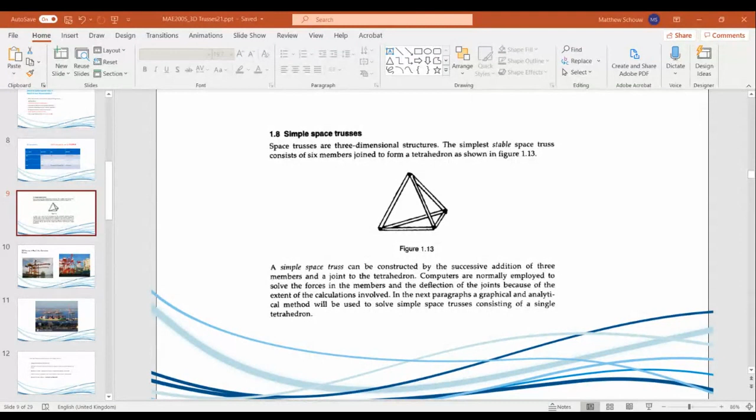Yeah, sorted, okay fantastic. So the chapter we're starting on is part of chapter 1, under the 3D truss section, or what we call a simple space truss. Just quickly going over what this is: a space truss is a three-dimensional structure, and the simplest stable space truss basically consists of 6 members and forms a tetrahedron. That's the most simple, basic form. It's not really of particular importance.

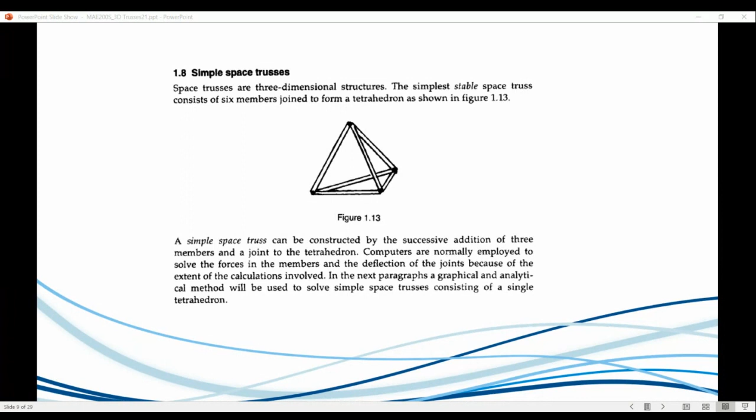So what we'll be essentially looking at is analytical methods for 3D trusses, right? Okay, let's move on.

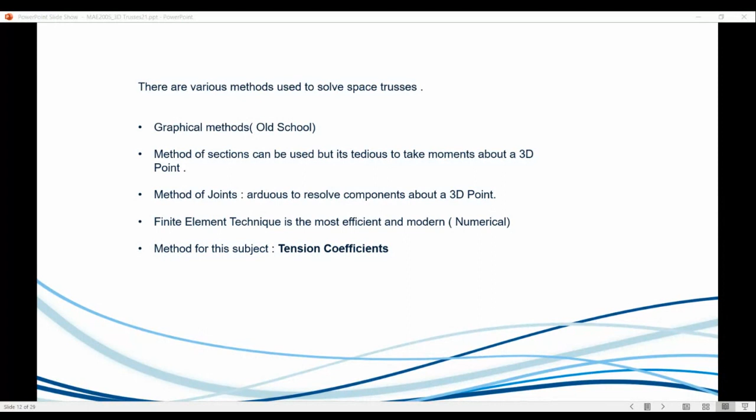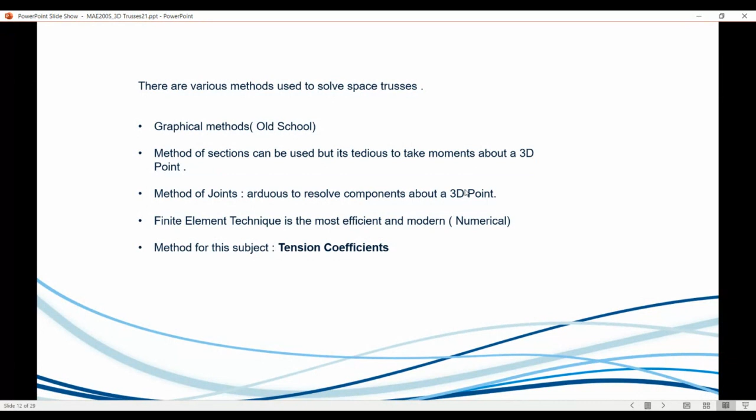Thank you. The method for this subject will be tension coefficients, or rather, the method you'd be assessed on is using this method. It's fairly quick to do, it's nice.

Okay, so this is just recapping on this. The methods I talked about, normally for simple space truss, we've got method of joints, which is all our favorite method. What we basically do is assume that the structure is in equilibrium, therefore our forces in the horizontal and vertical direction are zero, and then we can conduct analysis to find the forces within the members. We've also got method of sections, not everyone's favorite - basically you section off a portion of the truss, and then you can take moments at any particular joint.

Yeah, so these two are essentially what's covered in strength of materials 2. One must also view strength of materials 3 or maintenance engineering 2 as an extension of strength of materials 2, but it's a bit more challenging, solely due to it being an NQF level 6 subject, so it's like a final subject. It's not like plug and play, you've got to do a bit of thinking. Yeah, for this level of all my subjects, it's mostly plug and play, 50% plug and play, but the rest is a few spins, more for understanding purposes.

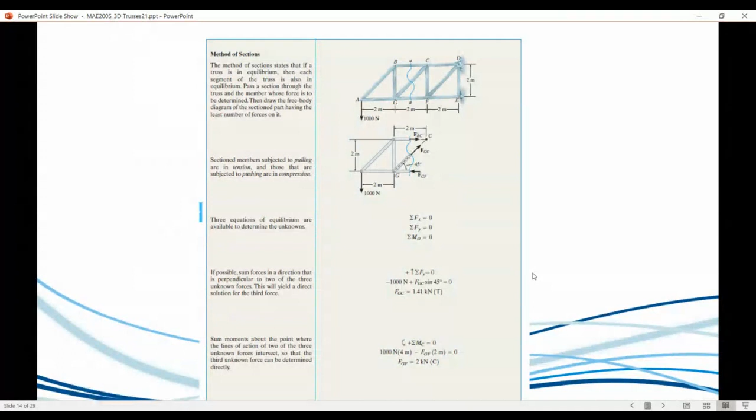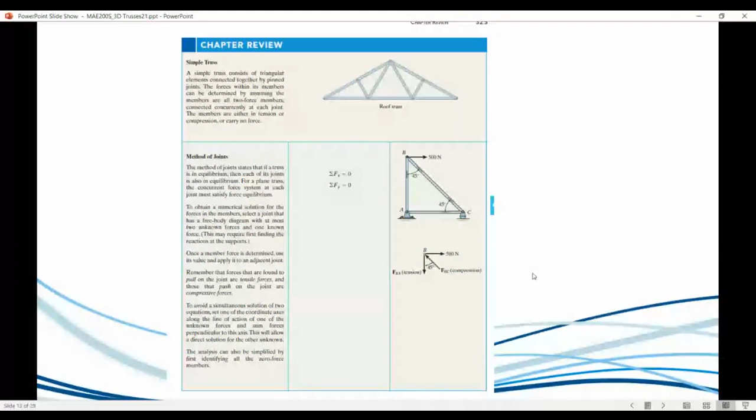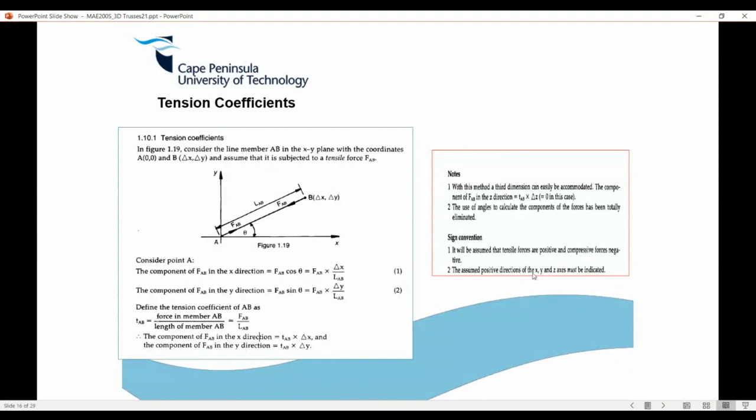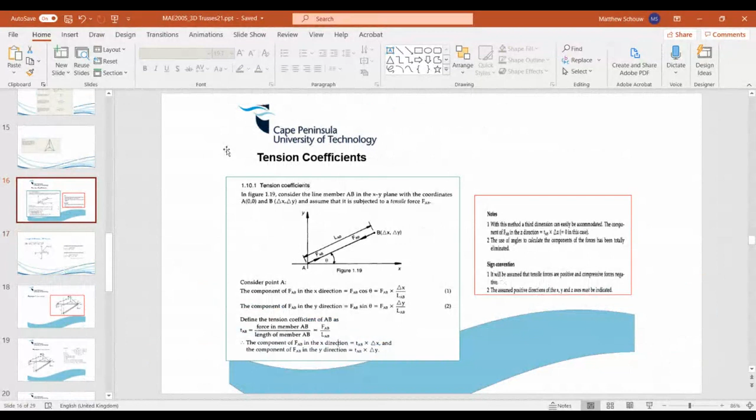So what is tension coefficients? How do we actually go about it? This is on page 13 in your textbook. I'll explain. So what we assume there is a member, it doesn't really matter what it is, you get the hang of it. Let me just exit this so I can write on the actual slide. Hope it'll be okay for everyone. Let me just have a look on Blackboard. Okay, yeah, so page 13, let me change my color up a bit.

So this over here is a member. In figure 1.19, we consider member AB, so this is obviously any member. This member looks like it's in tension, was it in compression? Well, it's actually in tension because the internal forces are acting that way, as I've discussed in the previous session. So what we essentially do is we resolve this in the x and y direction. So this will be x, FAB cos theta, you guys are aware of resolving components, and also FAB sine theta, so that obviously this will be the resultant. So we've got a force here, now all resolved here.

Now what they actually do is, because we're dealing with a coordinate plane here, an x and a y, and because these members have a specific length, and this is related to the coordinates x and y, we just essentially replace cos theta with the change in x, which is obviously your adjacent side over the hypotenuse, x delta x divided by LAB. And it's exactly the same for sine, which will be delta y over LAB.

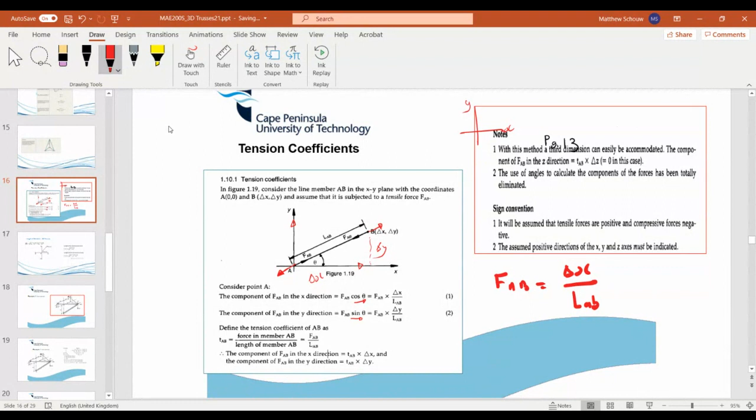So what they're saying here is that the tension coefficient TAB is FAB divided by LAB. And all we're doing really is substituting this LAB counterpart over here into here, and we end up with the force being some tension coefficient AB times delta X for the X direction, and then obviously for the Y direction, exactly the same thing - just very basic substitution.

So what's also important to note over here, I just have to delete this, is that with this method the third dimension can be easily accommodated, but the component of FAB in the Z direction is 0 in this case, obviously because we don't have an X, Y, Z plane here, but you will obviously see. What's cool about this is that the use of angles to calculate components of force has been totally eliminated, so you don't have to worry about cos 30, sine 30. We just essentially use the ratios of its position to its length.

Sounds a bit vague, don't worry, it's very simple. The sign convention is basically we assume tensile forces are positive, compressive forces are negative as per normal, and the assumed positive directions of X, Y, Z-axis must be indicated.

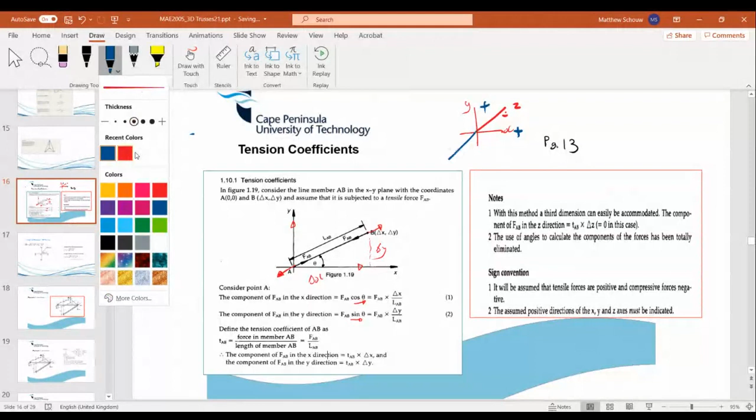Let me just get it. I just chose the wrong pen now. I need to reprogram my buttons here, guys. Sorry about this, so I can quickly edit as I go along. So where's my red pen? Just going that way. That's some of this blue one I chose. Okay, yep, there we go.

Back to blue, so this is going to be positive. That's going to be positive over here. That's obviously negative. Obviously negative. Negative. You see the idea.

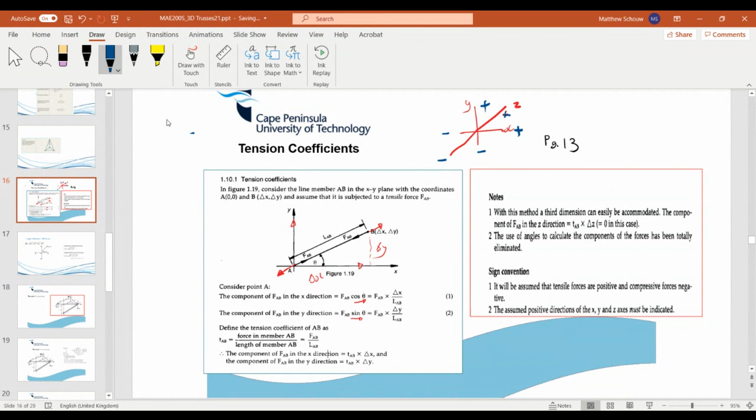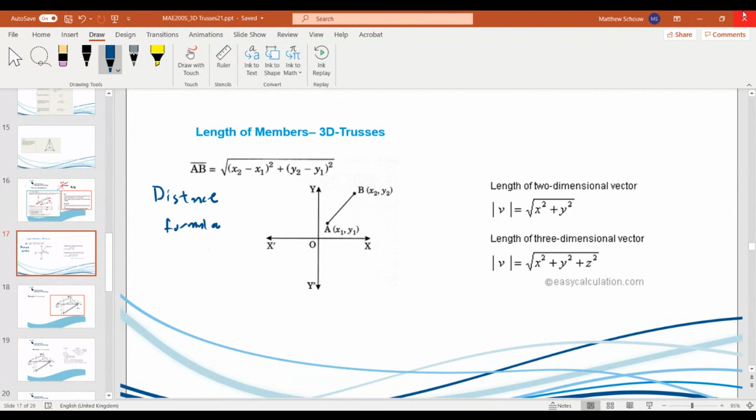So a length for a two-dimensional member, you guys are aware of the distance formula, this is the distance formula you were taught in geometry during grade 12. How we essentially find the length of a three-dimensional member is nearly the same, so you're going to have x squared plus y squared plus z squared. That's in your textbook, but a lot of students haven't done three-dimensional vectors and stuff like that. So just a small thing to note, it's not a really big thing, but essentially it's how you're going to find the length of the member.

Okay guys, so we're going to start on an official first example for S4. Let me just get my whiteboard ready here so I can start the actual example. Copy this and then paste it. Now some students will be a bit new to this now, so I'm just going to reshare my screen, but on a whiteboard so I can actually write.

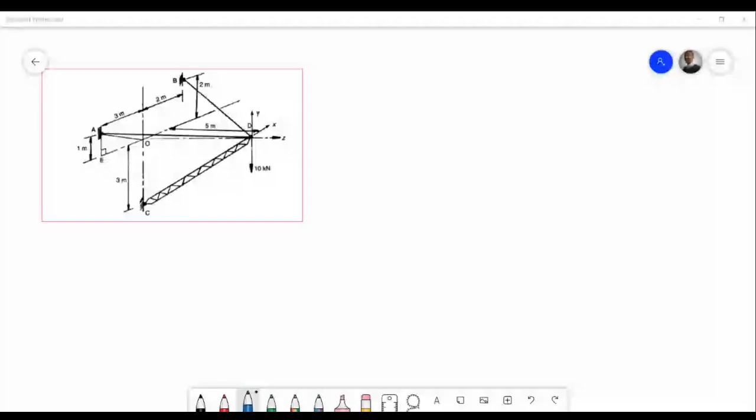What example is that? Is it 1.5, a diagram? This is 1.6. Oh yeah, this is 1.6 now. Yeah, oh okay, cool, this is example 1.6. I'll write it now.

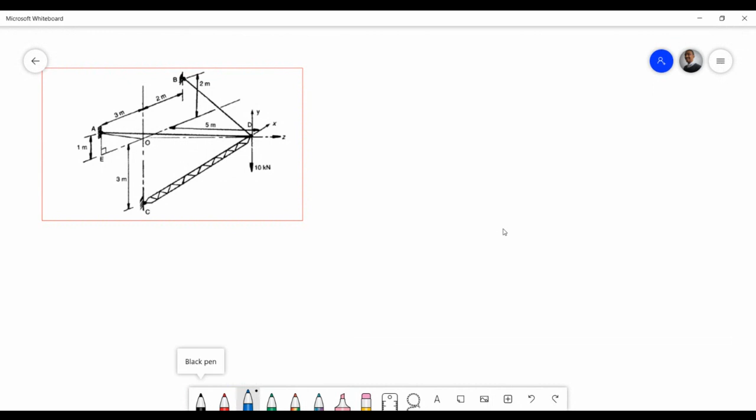So we have a black pen here, but I'm using a whiteboard in this case, so I probably should use a red pen. Example 1.6. Okay, so the question always states, what do you really want to do here, guys? Is just basically find the forces in these members.

Okay, I guess we are. Yeah, should be straightforward. Just erase all of this. Okay, so the first thing we do normally is find the sum of the forces in the x direction. I'll leave it blank there. Sum of the forces in the y direction, and sum of the forces in the z direction. Of course, you can apply this first law of equilibrium, static equilibrium.

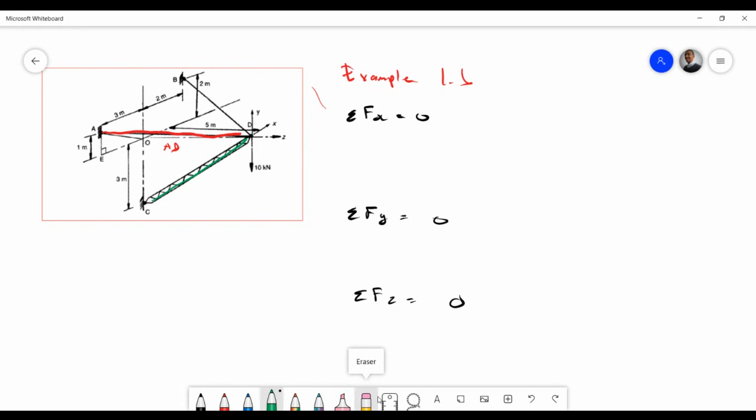So now what I normally like to do is actually just get my coordinates for each member. So we have 3 members here. So it's AD, that's my first member. My next member is CD. And my other member is BD. Can we all see that?

Sir, yes, go for it. What about AE? Is it not a member? AE, no it's not. Yeah, that's, I don't know why they call it E. I see it's not on the actual... yeah, it's not a member. It's just it looks like a member, but it's not. If you look at the actual example, I don't know why they have an AE there, it's quite strange. I can see why you think that though. But it's just 3 members actually, so don't worry too much. Okay, 3 members. But thank you for raising that.

Okay, where am I now? So let's go to the board.

So if we look at member A, right? I'm plotting this in terms of X, Y, and Z. That's a standard 3-dimensional Cartesian plane.

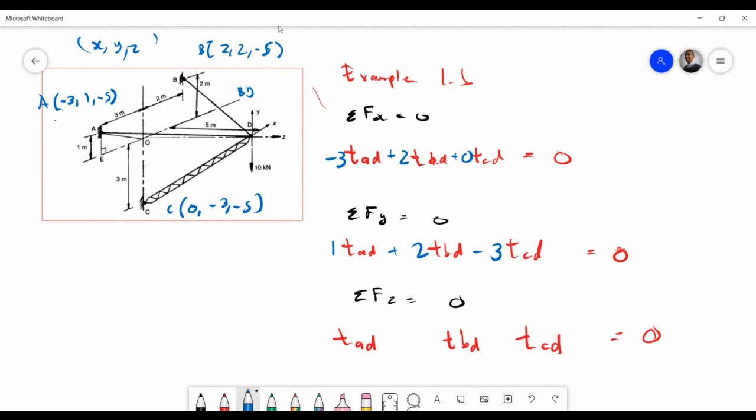And for all the coordinates, normally you're going to find the z's are normally all the same. So we can have minus 5 and minus 5, all equal to 0. Are we all happy with this? Yes, Zach, I'm getting there. Are we all happy with this? Yes sir, so far, fantastic.

So now Zach has raised the next question. I'm following the example step by step here. We have to look at the forces being applied on the 3D truss, right? The space truss. And if you have a look, you're lucky this time around, you got one force. You can have multiple forces acting on this thing -- in the X, Y, and the Z direction.

So obviously, if you look here, where is that force applied? It's applied in the Y direction over there, right? So that's going to be... 10 kilonewtons, right? So 10 kilonewtons.

There we go, don't forget the kilonewtons. Very important, a lot of students do forget. Or we can just keep it as 10, it'll be fine because the answers will come out in kilonewtons.

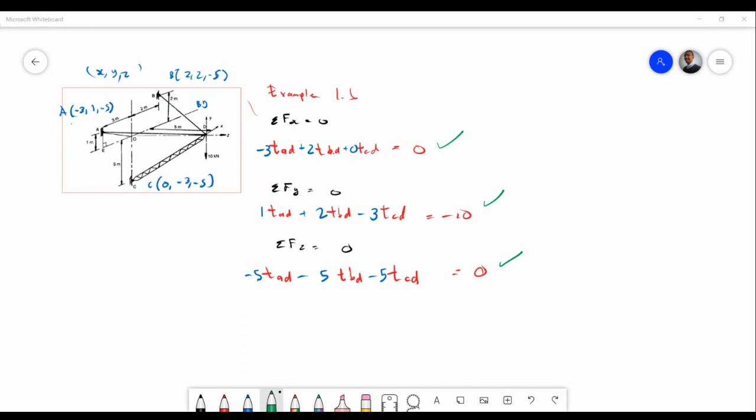Is this Leroy speaking or Alex? So I guess the way I see it now, minus 3 is in a direction with 10 kilonewtons in one direction -- they're going down, so that's negative. Yeah, both of them, that is correct. Yeah, so 10... oh, it's 10. Oh okay, I thought this minus 10 is supposed to be within the equation, and then when you equal it, it must be equal to 0. Yeah, that is correct. So what I'm doing here is you can say this is...

Let me just recap on this. No, you're fine, you're fine.

I could have said plus 10 equals 0, and I just carry it over. No, I see what it's saying - it's supposed to be minus 10. Yeah, my bad, it's minus 10 here. That's correct, that's my mistake. Okay, so it's minus 10, and then we carry it over, it becomes positive 10. Thank you for picking it up.

That'll put me in another place. Yeah, so it's minus 10, and then we carry it over. Thank you, so be aware of that. Yeah, so the sign essentially changes over here. Thank you, it should be 10 there.

So once we have that, guys, right? Thank you for that, that was going to kill me. Sorry, I just missed that.

What we're going to do is open up a matrix, a 3 by 3 matrix, right? Hey, so messy, let me sort out my pen here, man.

Just for your coefficients here, it's -3, 2, 0, 1. Obviously I expect you guys to write the matrix, I've told you this before. So what I'm just doing is essentially adding all the coefficients over here.

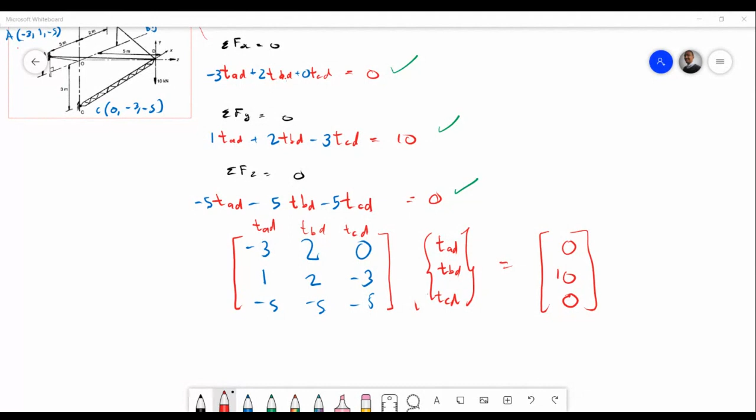Okay, you guys have to read it to me. So what's next is we're gonna have to share my Casio calculator, which I'll share now. Do you guys have my calculator shared? You see it? Yes sir, you guys can see it?

Yep, yeah. So you want to go to mode - right, a lot of my students, I've taught them good matrices habits. You go to number 5, and then you're gonna have to... no, whoa, I'm lying, sorry, let me go back. Hey, so mode...

Equation, what am I doing? Equation, sorry, and then number 2. So number 1 will solve a 2 by 2 matrix, and I'll show you how to play around with that. And of course we're going to number 3, so it's 3 equations, 3 unknowns.

Oh no, what am I pressing here? I'm not used to this. Okay, so can you see I have A, B, C, D? Are we all happy with that? So we just got to throw in our coefficients just like in the matrix, right?

So it's -3. Oh, what is the first one? -3, right? It's 2, 0, and that equals 0. Is that correct, students? Make sure this is right. Yes, it's right, the second one, thank you.

For the second one, thanks. It's going to be 1, I think - 2 must be in the right form. And then -3. And of course we've established that equals to 10.

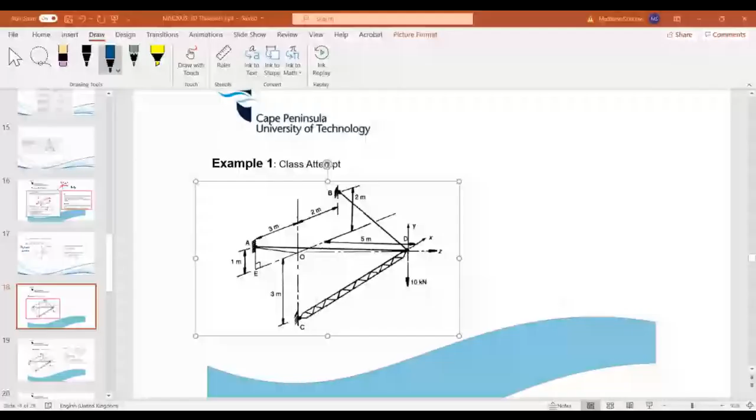It's perfectly fine. So remember, guys, back to the formal definition of a tension coefficient. The way we find forces is a force in a particular member equals your tension coefficient times your change in x. Or rather, it's just going to be force AD, or any force, and that's just your length times your tension coefficient. If you look at the units it all makes sense, because I don't expect any units for tension coefficients.

So, for instance, like this. Oh, sorry sir, I was having a problem with my mic. It's fine, how's the chief? Yes sir, I'm a little confused when it comes to the signs, like -3 and.

Okay, that's fine. Right, so get you this guy and that guy. Think about looking at the x and y plane from the side. Do you see that? Normally you're used to looking at it like this. You understand? Are you happy about that? Yes sir.

Great chief, just give me a second. My Zeta is now just not in the line of where I wanted to be. So what happens now, we've got a new one here, right? A Z, you see Z there? There's Z. Yes sir, obviously, yeah.

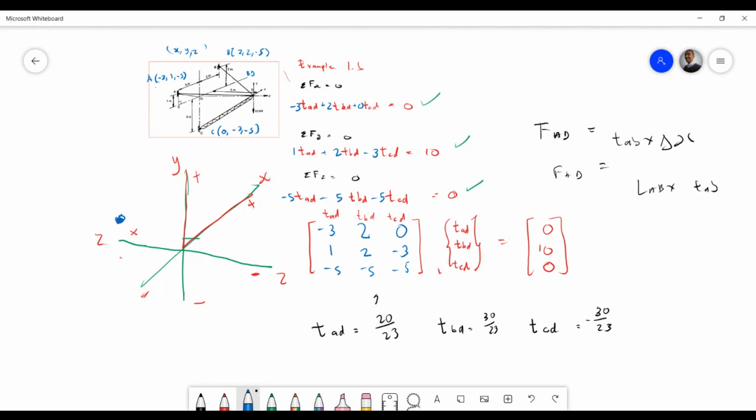You see, so we're plotting some point, like I'm saying this point over here, I'm putting this point here. It's a three-dimensional point if we think about it, some three-dimensional point, you see. If I'm going to put this here, right, this is, you can see where this is, like in a positive, or depending obviously where this thing is.

In this case here, let me just zoom this in again. Here we've got 2, right? Yes, it's 2 away from this. It'll show you there, and then it's 2 away from that there. But the member goes all the way, it starts over there essentially, and therefore you can see that line over there. You see there, -5. Yes. So it gives you that. If it was going the other way, obviously all these colors could confuse you, it would have been +5. So what I'm trying to say, like that.

Okay, I want to move on with this. Sorry, I just missed something. So with this now we can compute. Matthew, you're speaking there, okay, yeah, so sorry, continue. So to compute our forces, what we have to basically do now is get the length of the member and times by tension coefficient.

So to obtain your length is fairly easy, I'll just do it for the first one. Remember what I showed you in the three-dimensional thing, that's why I said look at the coordinates, right? So length is just going to be your coordinates all squared and of course rooted. So we've got 3 on the x, 1, and we've got 5. So that's 3 squared plus 1 squared plus 5 squared, right? Obviously the sign doesn't matter because once you square it, it becomes positive. And we multiply that by the tension coefficient, that's 20 over 23. Okay, can someone give me the next length as well?

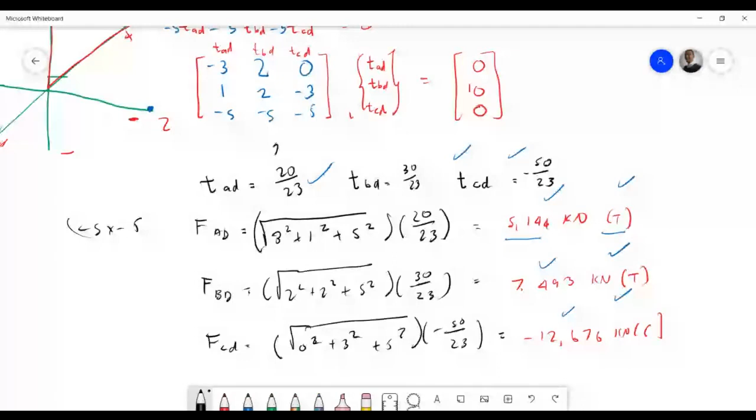I'll use a calculator, but obviously it's not just based on that. So what we're going to do now, I just wanted to play around. So go back to your matrix, and then what you should do is see what happens when you change these values. So what happens if, I always love these add-on questions, right? What happens if I have a force here of 30 and maybe a force here of 5?

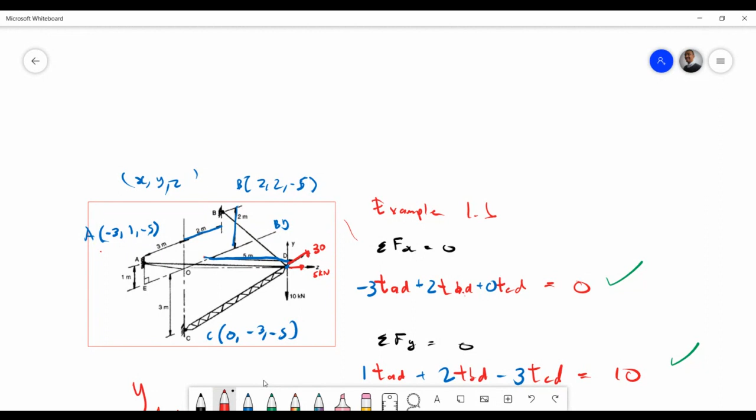So what I normally do with my questions, and you'll probably see the next example, is that I will say, okay, now let's add more forces, and then let's see if it's going to fail. So just to recap for you, Nela, okay, so like I said, now we have new forces, and the new force is going to be, it's in the z direction, that's going to be a 5 kilonewton, right? And in our x direction, I've said I'm going a 30 in.

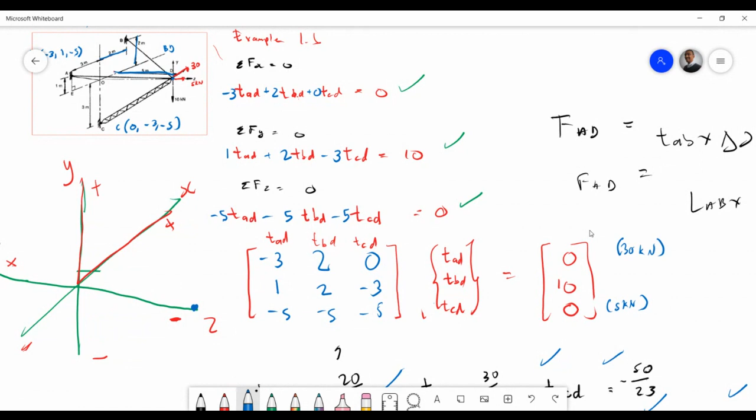Let's see how members behave now, right? Are we all there? So Nela, this is to show you. I always check when things fail, you know me, I like to see.

Where is the load? And the textbook is playing too safe - it's always giving you the nice answers.